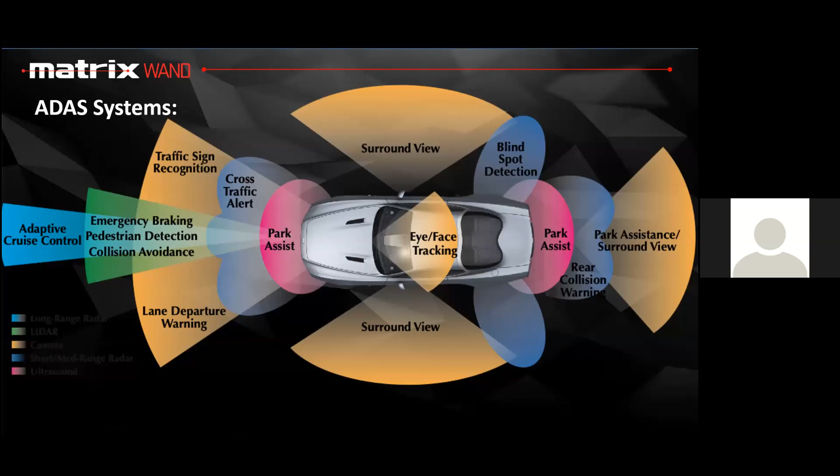So until we start really measuring every vehicle that potentially could have a sensor that moved or disrupted, we're not completely indemnifying and bringing that car back to pre-loss condition. So we want to start off by verifying the structure. This is something we've kind of done in the industry for a while. We've always been looking at that lower body and making sure it's where it needs to be. And then, of course, making sure we've got all the access to the data to reference, to make sure that, okay, yeah, it's square, but maybe it was hit funny, so it looks like it's square, but it's really not. We need to make sure we've got easy access to all of that data.

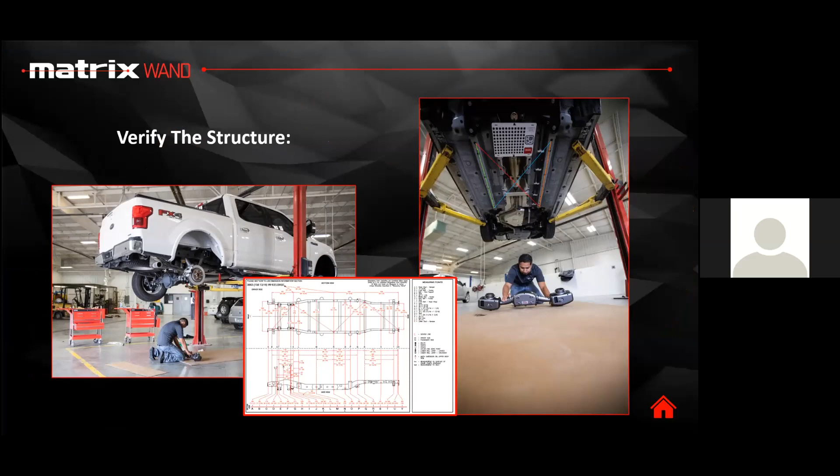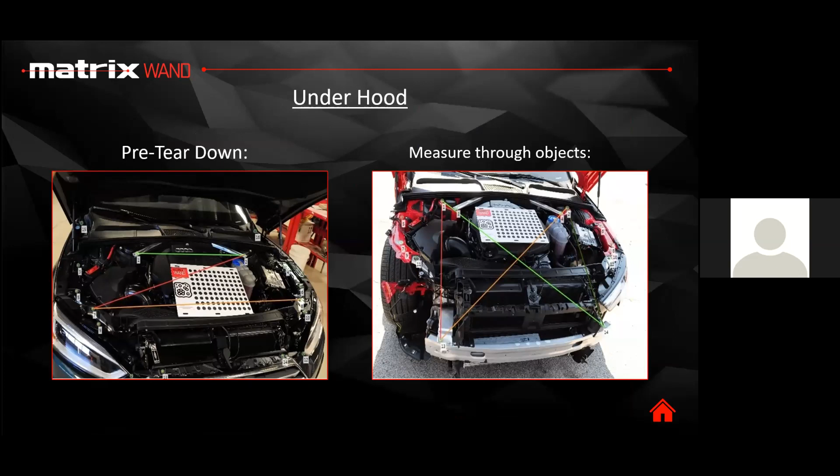And then we also need to realize it's not just the underbody. We need to start actively measuring the upper structure of the vehicle, however you want to do that, right when it comes in for a pre-tear down or after you've disassembled some components off the vehicle. We need to start doing this at the beginning of the repair to confirm that upper body damage. If something's hit extraordinarily hard, maybe we start thinking outside the box.

Maybe if two rails have just totally mashed in and we can't even trust the strut towers anymore, those might have damage. Well, maybe we need to start working our way up to different parts of the vehicle and different parts of the structure to start finding something that we can trust, so then we can go ahead and find and document the true damage and find exactly how far back it goes.

But identifying this damage today isn't as easy as it was just 5 years ago, with all the different high-strength steels being released every single year by the manufacturers. The cars absorb energy differently, so it's a different process to find that damage and see exactly where it went in today's day and age. Our margin of error, unfortunately, has gotten a lot smaller when it comes to these newer vehicles.

So Sergio, I want to turn it over to you and bring some of the technical side into this, and we can start explaining how some of this ADAS works in relation to the structure and the suspension, and then how we might be able to start documenting this and putting it on an estimate for a bill payer during the actual repair process. So Sergio, if you want to take over.

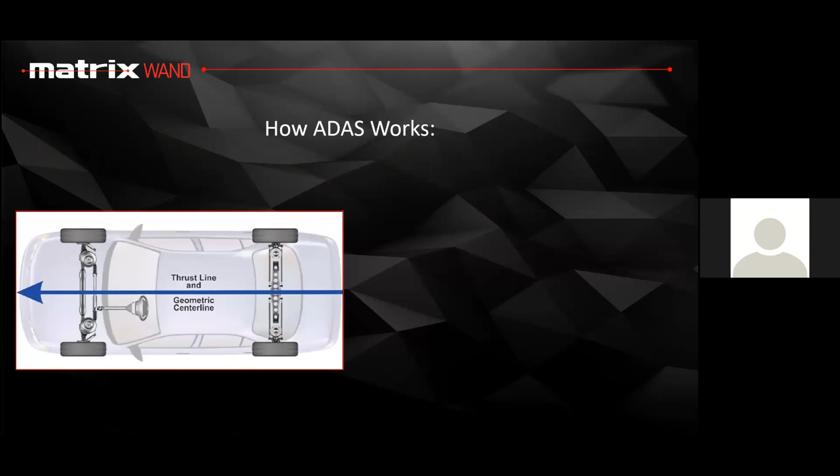Yeah. So like Avery described, a lot of the ADAS is based on a perfect world scenario, you know, the vehicle structure being correct. The other to that is the alignment. One of the first things before doing a calibration is an alignment has to be done to the vehicle.

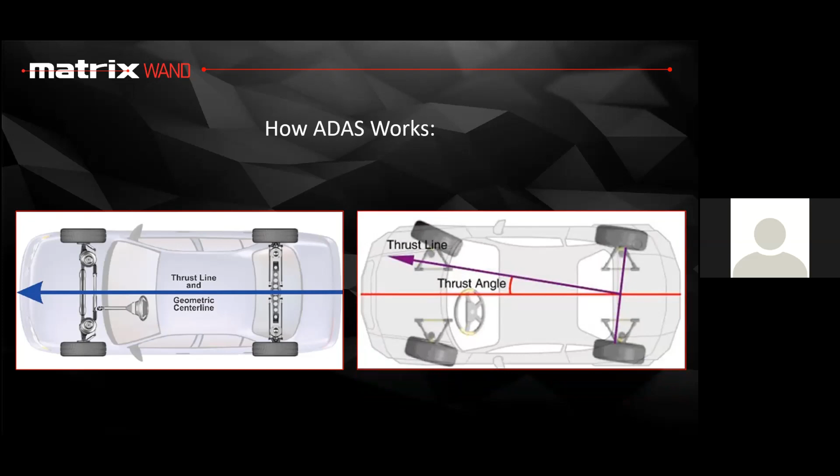Before even being able to do a proper alignment on a vehicle, we need to verify that the structure is correct. So as a shop, once we verify the structure is correct, we need to verify that the alignment is correct. If not, we will have a vehicle going down the road potentially, like what we see here on the screen, ultimately having either failed calibrations or improper calibrations.

Like Avery mentioned, the margin of error could potentially be feet when we're talking in millimeters. Depending on the type of sensors we have, they're reading out 300 feet. 3 millimeters at the vehicle could potentially be 18 feet. We can multiply that, 600 feet, and now we're sitting at 36 feet.

So it's very important that the structure of the vehicle be correct, not only the lower body but the upper body, and then the alignment. Then we can pinpoint down where the cameras and sensors are. We can start measuring those locations, being able to do comparatives of the vehicle, or doing a vehicle match comparative, which the Matrix Wand has the ability to do.

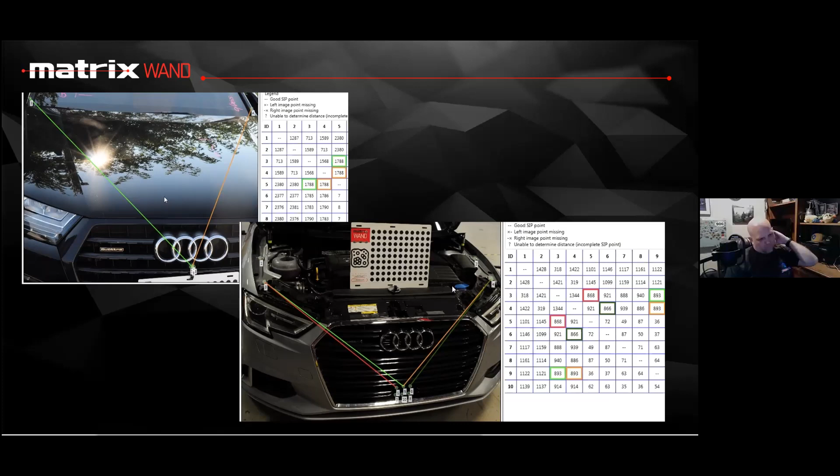There again, we verified the structure of the vehicle, everything is correct. If we replace the quarter panel, we need to verify that it's in the correct placement before we even put a bracket or more so a sensor.

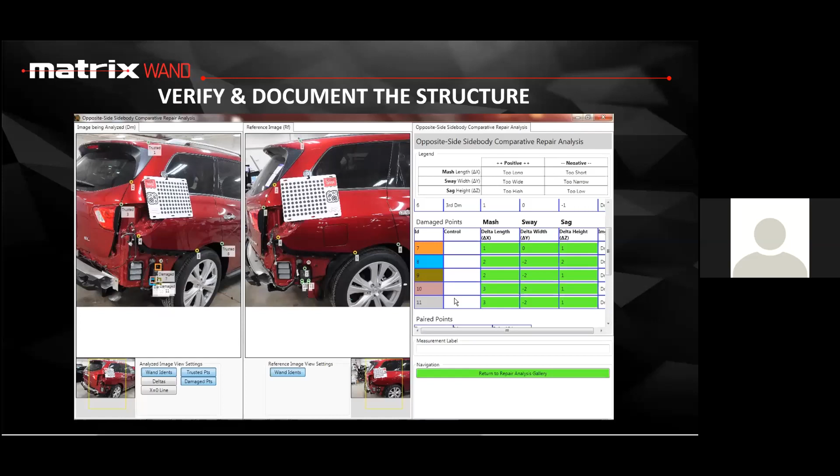So we can do comparative measurements as we see here and be able to truly measure it in 3D, and now be able to have that documentation that we've done and taken all the steps correctly so that we can avoid a lot of that liability.

It also gives us peace of mind so that when we send something out, whether it's for an alignment or calibration, we know it's going to properly calibrate our line and not play that dancing game of sending it out, coming back, and doing a lot of trial and error.

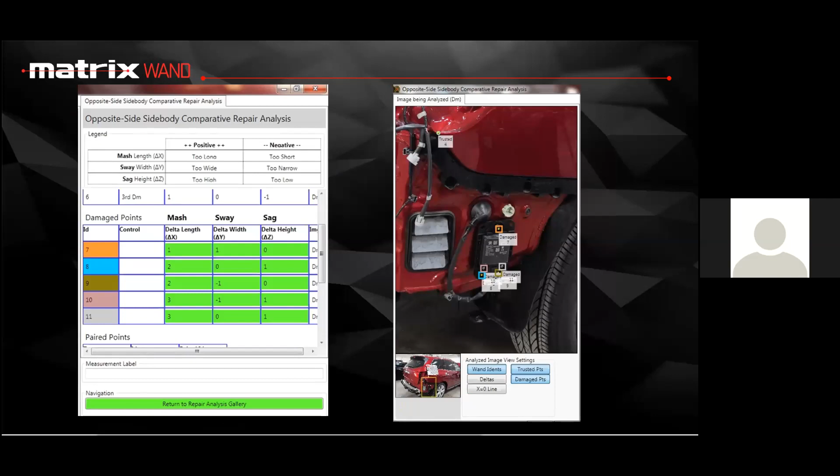So we're able to document and see that in 3D at various different locations, whether we're measuring the sensor, the bracket, quarter panel, or the mounting location. We can now see that visually, and it's very transparent. Anyone looking at this can see that this is the vehicle we are working on. We can see the area that we are measuring, and then we can see the measurements there highlighted in colors and in millimeters, for each of the length, width, and height.

Sergio, just to bounce off what you're saying, that's really important, the documentation aspect and having a picture of the actual vehicle when it comes to this. A lot of times when we talk to insurance companies and adjusters and they get measurements from a shop, they appreciate that, but in the back of their mind they're wondering, are these measurements that I can actually trust? Have these been flubbed? So whenever it's possible to capture that in an image and add it into your documentation, it really increases your chances of getting compensated for taking that measurement tenfold.

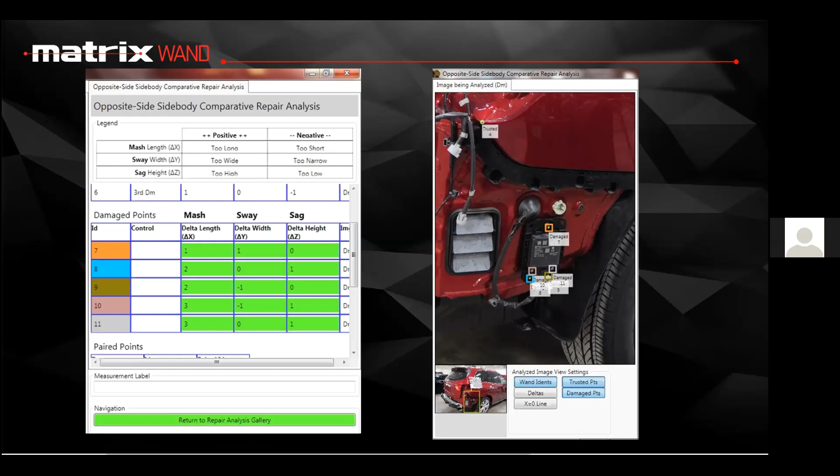So we can see here other applications being able to do various different measurements. We can see here the area of location. These are vulnerable areas where a lot of these sensors are placed. A lot of times it doesn't take much to move these out of alignment, even though we find no structural damage or even see visual structural damage. With measurements, we can now verify.

Simple as this one here: this was a Honda Odyssey that had been impacted in this corner, the driver's side rear bumper cover. Some damage to the bumper cover. The body shop was going to replace the bumper cover because of the damage, and didn't allow any repairs or paint to be done in that area.

But the shop was looking at the sensor and everything seemed to be okay looking at it. They just wanted to verify and be able to document that way when they send it out for calibrations, in case there were any questions about it. This was just a comparative done of the actual sensor itself. You can see on the top right-hand side, they measured the actual bracket of the blind spot monitor sensor there.

And we can see that it measured on the measuring points there in the left bottom corner, everything measured within 3 millimeters of length, width, and height.

They took it one step further and unmounted that bracket from the quarter panel and measured the mounting nutserts that the Honda uses. We can see that at those points, 7, 6, and 8, they all measured within 1 millimeter respectively in 3D.

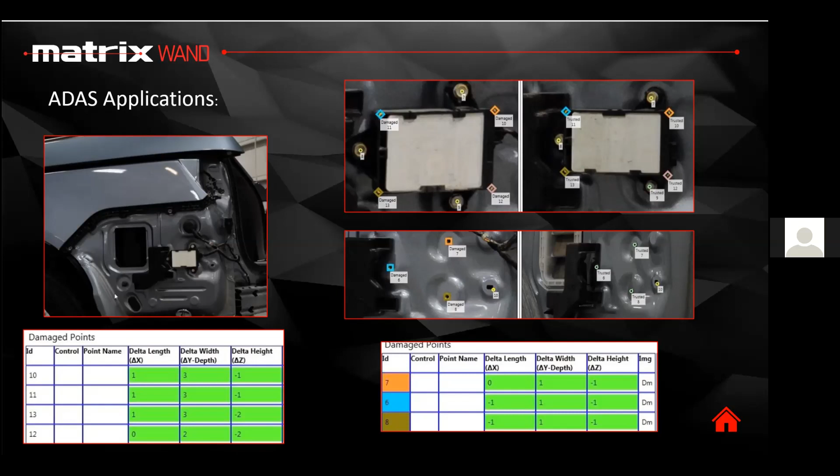So now, Sergio, when they're ready to take this to the actual calibration process, now we can start verifying that we're setting the calibration process up per the OEM spec as well. Can you kind of explain that whole process and why that's important?

Yeah, that's important as well, because we want to verify that we've checked the area correctly, where that blind spot monitor sensor or camera, whatever it may be, is properly positioned or measures on the vehicle. One step further in being able to verify and document is the procedure for the calibrations.

I know a lot of shops are bringing the calibrations in-house, and one of the things I keep hearing is, well, how can we verify that we did the calibration process properly? Using the matrix wand, that's another thing that we can do and verify.

So it's just one more step to be able to verify that during the calibration process, we are doing it correctly. Because unfortunately, I've seen, and I know me and Jason did a video of people falsifying calibrations just to get them to pass. Unfortunately, there's people putting videos like that on YouTube. And this now we can see, cover our butts in the process of doing the calibrations.

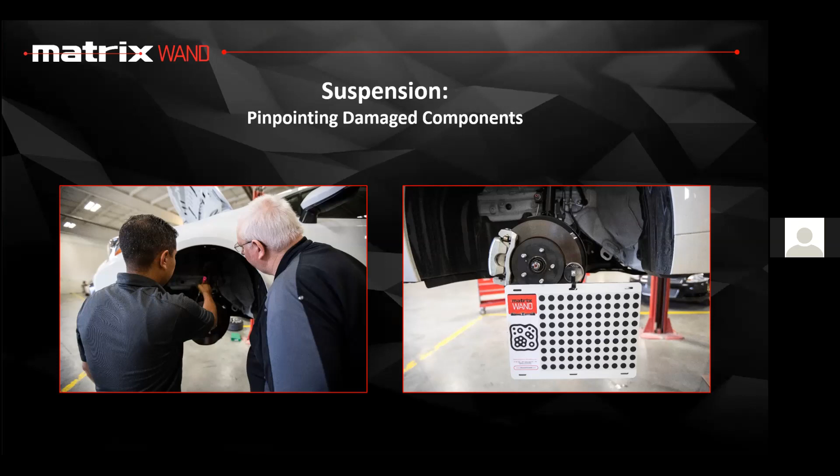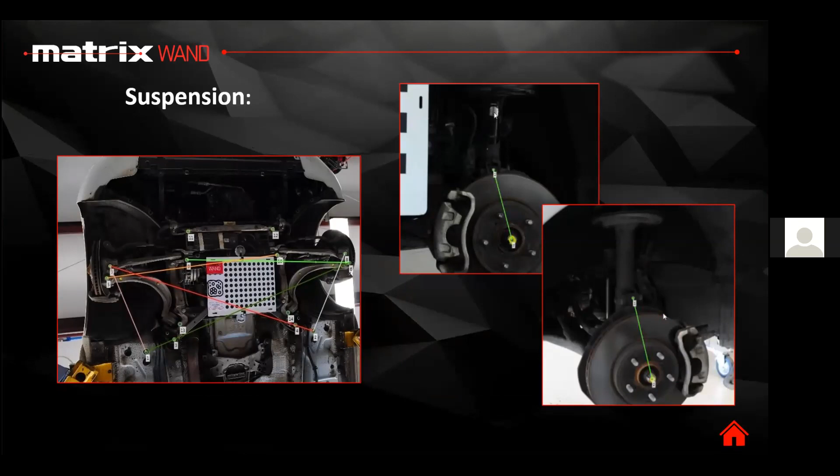Yes, so pinpointing any potential issue right at the beginning is obviously the most important thing. From my background of being a technician and working with various different shops, pinpointing the issue of why we had a failed alignment is always a guessing game a lot of the times, or we're throwing various different parts at it. So with the Matrix Wand, we can now pinpoint this ahead of time before this goes out for an alignment. On the screen, what you see here, this is a Honda Accord.

This was actually one that I was doing at a shop demonstrating. They pulled this vehicle in that morning. It had impacted, there was an impact to the driver's side wheel that had actually exploded the rim. We could physically see some damage in the inner wheel well there by the dog leg of the fender. And the only visual component that we could see that was damaged was the outer tie rod.

Looking at everything else, everything looked to be pretty good. The wheel did kind of look to be a little bit pigeon-toed, towed in a little bit, and then kind of set back. So we potentially thought, okay, maybe some caster or misalignment.

So the first thing we did is we measured the knuckle, and we can see that point 1 to 2, we're measuring from a top casting mark on top of the knuckle to the center of the hub assembly, and then to a point on the strut. We did a comparative from the driver's side to the passenger side. We can see that our measurements of our knuckle measured dead even at 248 millimeters. We are 2 millimeters deviated there from our strut point to our center of hub assembly or half shaft, which could show it just needed to be aligned.

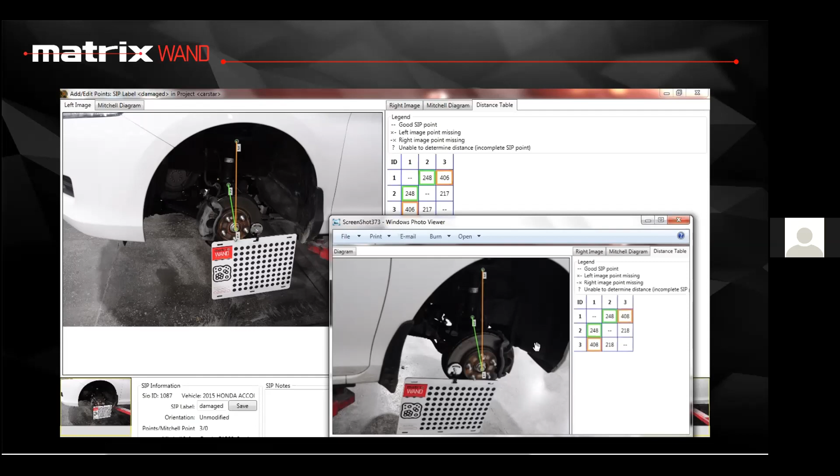So we wanted to verify that there was no damage on the knuckle itself. So then we measured from the ear portion of that knuckle where the outer tie rod bolts in, and we measured to there again to the center of the half shaft. When we measured here, we were able to see a deviated measurement of 3 millimeters from one side to the other, showing that in this cast component, there was a 3 millimeter variance. And from the various different components, especially cast components, knuckles, control arms, typically anything over 2 millimeters is damaged and won't be able to get aligned properly.

So now we're able to verify that the tie rod was bent due to the hard hit that it took, and we're seeing here that the knuckle itself has some damage in it as well.

But Sergio, on the knuckle itself, there was no physical damage. There was nothing that we could have taken a picture of as an estimator and uploaded through CCC or Mitchell to get approval to replace that knuckle. It had different specs now because it was damaged. Correct. Yeah, there was nothing showing that that thing was bent. There was no cracks, no paint flaking. It's just when we did the measurement from these casting seams and marks, we were able to show that.

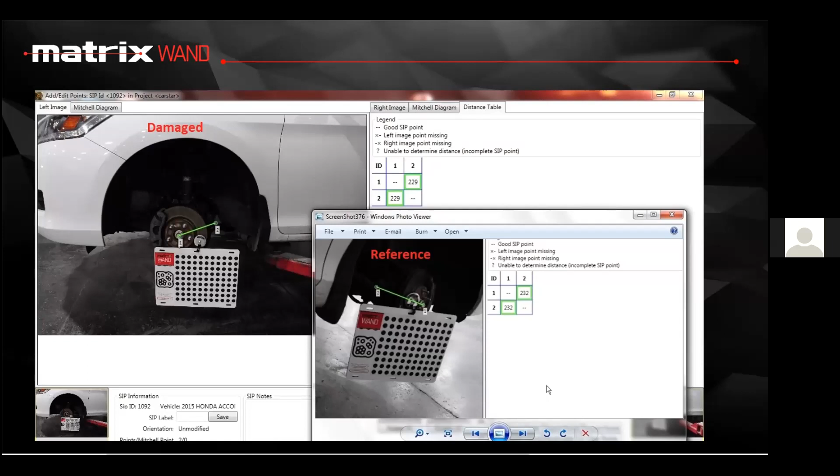So then we took it underneath. We raised the vehicle up on a 2-post lift. We wanted to verify, obviously, the structure of the vehicle, but also the cradle. Did the cradle get impacted enough to damage it or cause misalignment from the vehicle? These are a lot of the steps that we take into verifying whether we've got a suspension component that's damaged. Obviously, there again, we want to verify if the structure is correct, which we did on this vehicle. We measured from the torque box areas all the way up to the front core support.

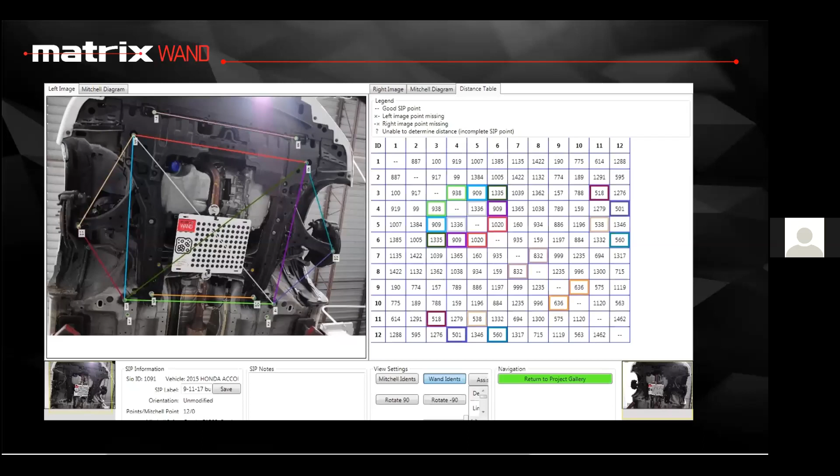And then we squared out and verified that our cradle was not deviated or bent, twisted. There again, everything was measuring out to the specs that we're supposed to have. And then the last thing is we wanted to verify that the cradle itself wasn't misaligned to the vehicle. From our measurements that we see here, we can see that we measured out to the cradle from points 1 to 6, which measured out at 1,385. Points 2 to 5, the cross measurement, 1,384. Our straight line measurements, point 1 to 5, were 1,007. And points 2 to 6, 1,005. So we're within a couple millimeters there, and all within the spec data that we had for this vehicle.

So from there, then now we wanted to validate to see if there was any damage to the control arm or misalignment. We could see that in the inner wheel well, the wheel had actually impacted in that area. So we wanted to see if we had a potential lower control arm that was damaged. If we take the measurements of point 2 to 12, we can see that that was measuring at 595 millimeters. And the opposite side was measuring at 614. We can see at 501 to 518, points 4 to 12 as well. Those were areas from the torque box area. So we could see that we had about 17 millimeters from the ball joint down to the torque box area deviated from one side to the other.

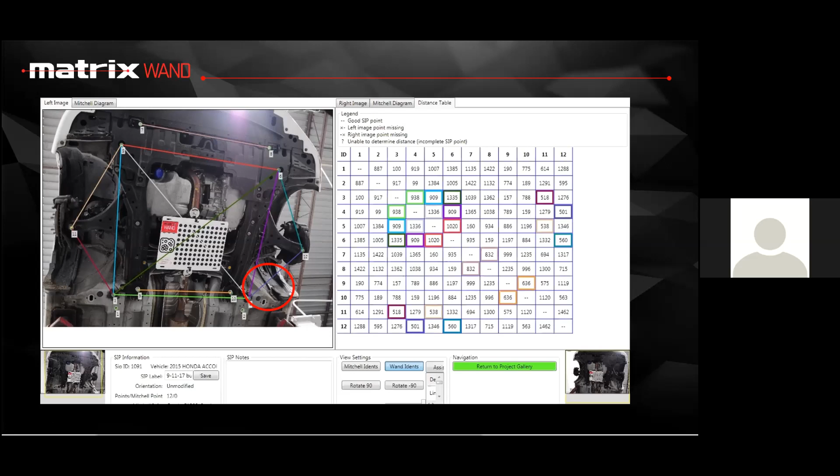So we could clearly see that that lower control arm was back. Obviously, this was all done in point-to-point, two-dimensional. A lot of things you can do with your tram, but by being able to use the Mitchell reference data, we were able to now compare those in a point-to-point, as you can see here.

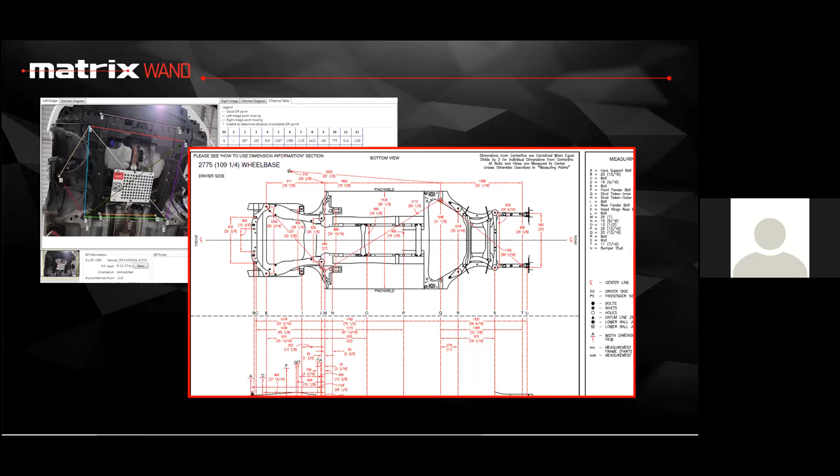We were able to take it one step further and take it into a 3D analysis. And so here what we did is once we selected our points, we just compared our points to the Mitchell spec data that is integrated into our system. That way, that's why you can see here on various of the points, there's a letter associated to the number. There's known 3D data for those points.

And so we can see that at the points for the cradle and the structure of the body, everything was measuring correctly in the green, as we can see there. Where we see the measurements there in red are on that lower control arm. And we did a comparative on that to the opposite side. And on that measurement, we could see that we were actually back by 23 millimeters and swayed out by 5.

So not only did we have a knuckle that was damaged, we had a lower control arm that also had some damage. But we verified that there was no movement to the structure, no movement to the cradle, or any damage to the cradle.

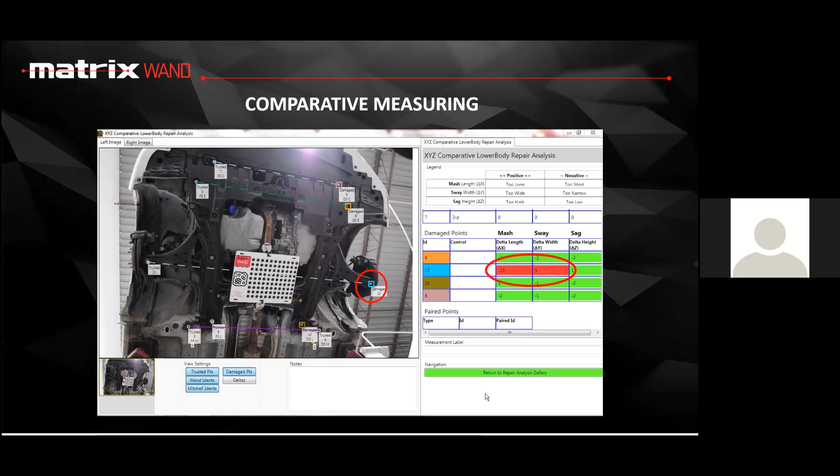And here's the points that we associated when we did a 3D data to the Mitchell specs. It actually provides an image of various different points. Now on that lower control arm, we did a comparative because they don't provide any 3D data for lower control arms, ball joints, knuckles, and such components like that. But as far as the structure, we can do that.

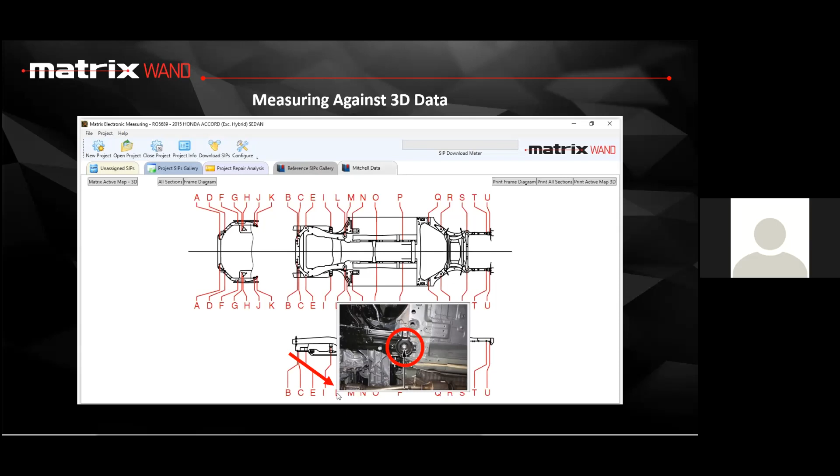So Sergio, now that we've kind of gone through, we've verified the ADAS positioning by verifying the structure of the car. We've gone through, we've verified, the suspension damage and where we're going to see that suspension damage. Now it's a matter of documenting all of our findings and needed repairs for the bill payer, and documenting it in a way where we can really feel comfortable that we can guarantee that we're going to get compensated and get everything we're asking for.

So when it comes to getting compensated by the bill payer for these repairs, and when it comes to ADAS and structural and suspension damages, we need to make sure that we're meeting the contractual language of the policy. That's super important.

There's certain things in an insurance policy that specifies that that's the vehicle insured. And the more that we can include that language and that information into your documentation, the better of a chance you have to get compensated for that repair.

Because no matter what, we're all good collision repair professionals. We know we're going to do what's right for the car. It's going to leave right, for the OEM procedures. Now we just need to make sure that we have the easiest time getting paid for it.

So the things we need to look for: the year, make, model, and VIN. If we can make sure that we can verify that that's the vehicle that we're talking about in the pictures, we're going to have such an easier time.

So when it comes to your report that you're submitting in with your estimate, when it comes to your damages, we need to make sure that that language matches the insurance contractual requirements. So we've got the owner's name of the vehicle, whoever the insurance policy is under, the year, the make, the model, and the VIN. It needs to be clearly identifiable on any documentation that you're submitting.

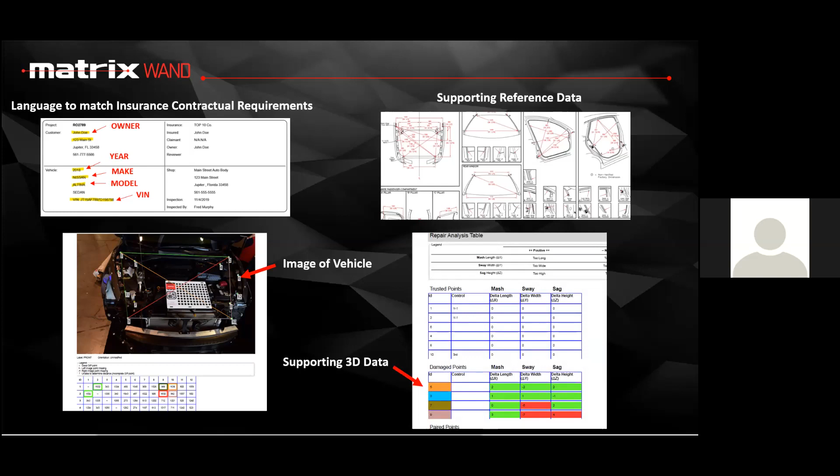So in a quick review of everything we've covered so far: we need to verify the structure to start with, and document that process. We need to verify that our ADAS mounting and sensor locations are correct, and document that process as well. And finally, we need to verify that the suspension has a great alignment before we send out for recalibration, and document that process too.

So the tool that we use to do all of this, to show you these examples on how you can document effectively when it comes to structure and suspension, is the Matrix Wand. If you're not familiar with it, it's a 3D measuring tool that uses photogrammetry, what we call stereoscopic imaging, to find all these measurements.

We recently went through and revitalized a lot that goes along with the wand. It's got a fresh new paint code that we're putting on it - it used to be gray, it's now red. We just updated the cart here recently as well, and as of last week we have a new pricing structure.

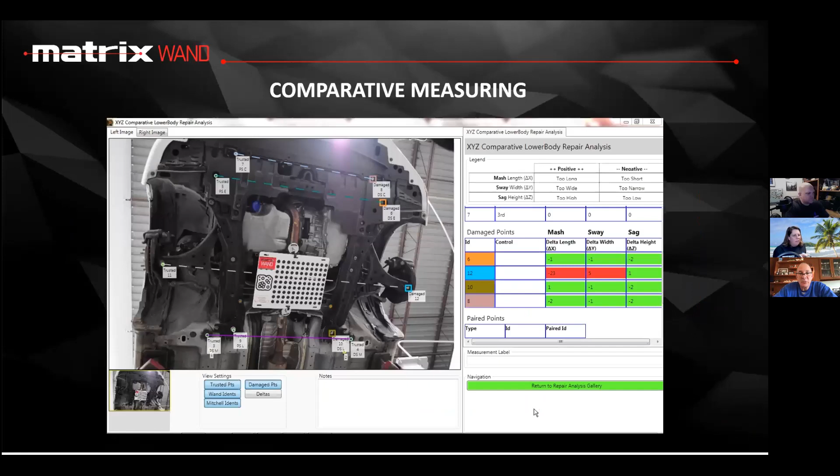So if you were on the call, Jason, was that yesterday? The days are running together. Yesterday with Opus, and we're talking about from their perspective as the third party scanning the vehicle, they have to ensure the technician has actually followed these rules, that they've done the measurements right, that they've done the center line, that the target's in the right place, it's the right distance, it's the right everything that's supposed to be. So as a third party scan tool company, they're trusting that all that was done.

Because literally the Matrix Wand will measure anything, like the door frames in my office or where the trees are in my front yard. Just because it's science, I can do something like this photo and I can visually prove beyond a shadow of a doubt that I had everything right where it was supposed to be. And that photo documentation is amazing for me.

The other thing that's really cool, and they don't mention it about this tool that I talk about all the time, that I would love from a court perspective, is your measurements are evergreen. So meaning you measure this car here with this picture, I could go back a year later, choose new points and take new measurements.

Sergio usually always tells me if you can see it, you can measure it in the photo. So if I was preparing in a court case and my shop had forgot to measure some measurement that I really wanted, or Larry, when it comes to suspension, oh my God, the things he wants to know, I could pull that up really quick and remeasure, and I don't have to have a car ever again in my shop, because once I've got those photos in, I'm measuring that car for life. And that's something I can't do on any other measuring system either.